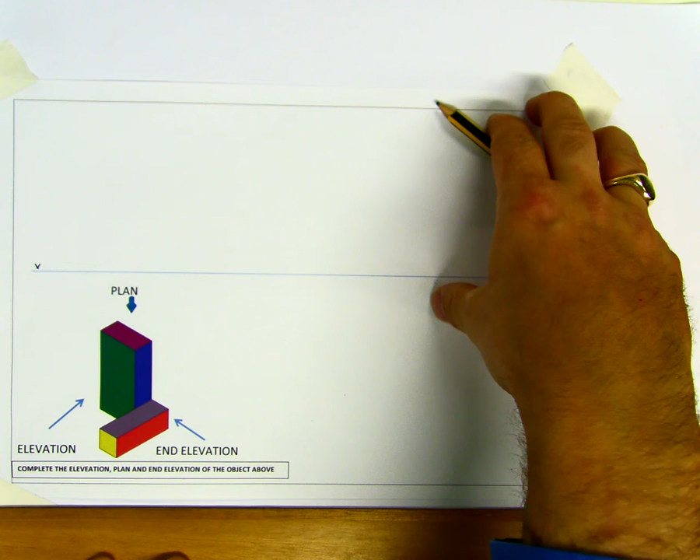If our drawing is down in the bottom left hand corner, we should always start our drawing in the top right hand corner. It's left room on purpose, so you should realise that straight away. If it was here, you'd start your elevation, plan and end view. If the drawing started here, you'd have gaps, so you'd have your elevation, plan and end view.

In the exam there's 3 of these questions. You're going to be able to figure out where to start the question straight away, so you won't be wasting loads of time. So what shape are we going to be looking at from the elevation?

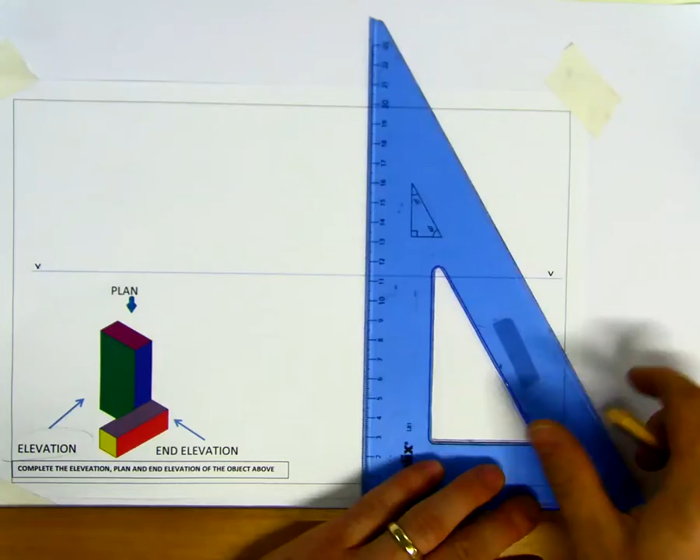What shape is it? A rectangle and a square. So the first thing I'm going to do is draw a rectangle.

It's 20, so I've measured it there, 20 by 40. Measure across 20, mark it, bring up my 2 lines. Now, very lightly - they're construction lines, you don't heavy in anything yet. At the start, always do it really lightly. So this is 20, and then the height is 40. So mark 40 - we have the first shape, which is a rectangle.

And what colour am I going to colour that one in? Green. Okay, would it help if the green was working? I'll use this one - so this is green.

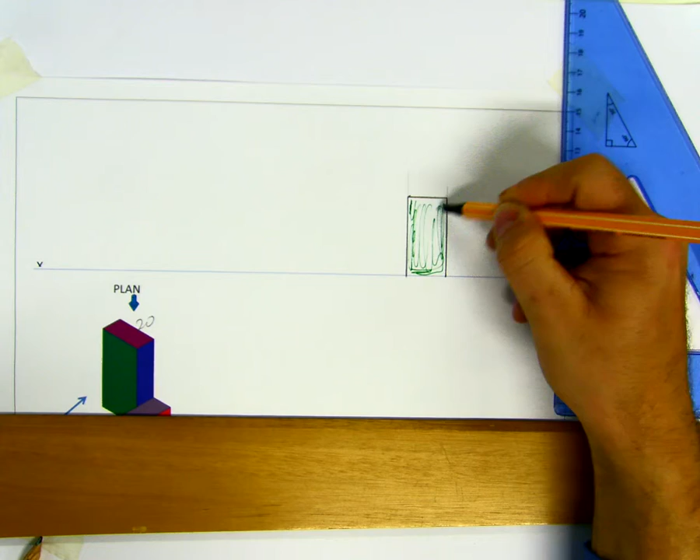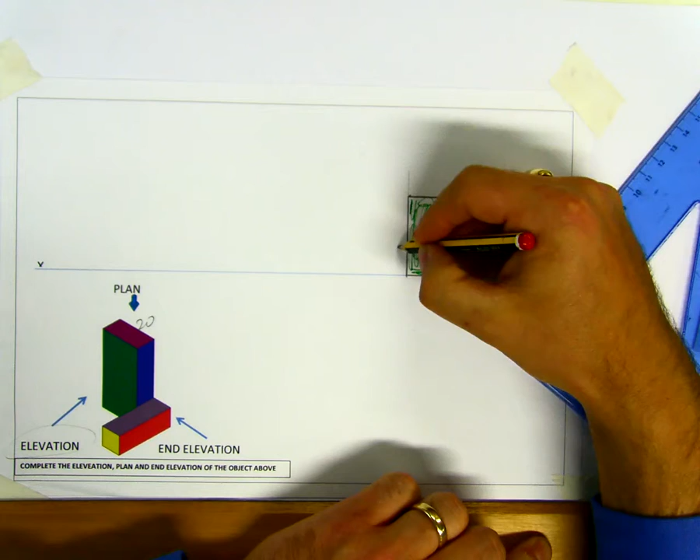So what else have I to put on it? A yellow square. Where's it going to go? On the right side. So I've measured it, it's a square, 10 by 10. So I've measured across 10. This was 40, this was 20, measured across 10 here, and measured up 10.

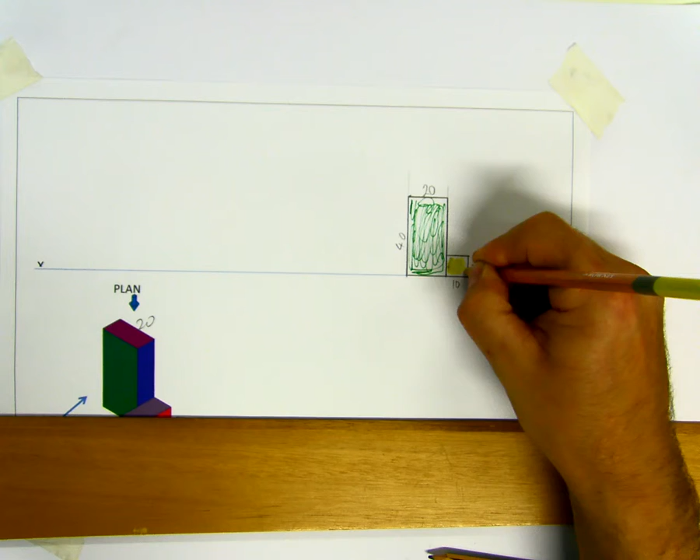And it's going to be what colour? Yellow. Okay, did anyone have any problem with that so far? Did it too big? That's fine. Is it in proportion - is it a rectangle and a square? Yeah.

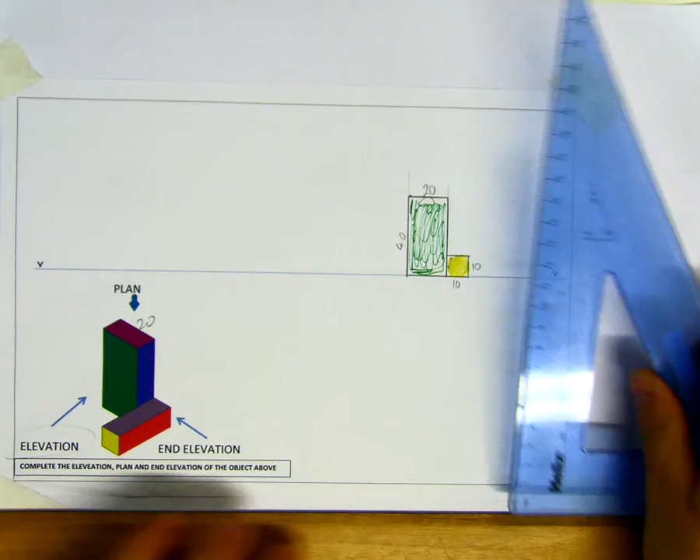Okay, well you wouldn't lose too many marks as long as it's in proportion, because you don't have measurements on the drawing - you're just taking the measurements off it. So then the next thing we do is, that's our elevation. Anyone have any problems?

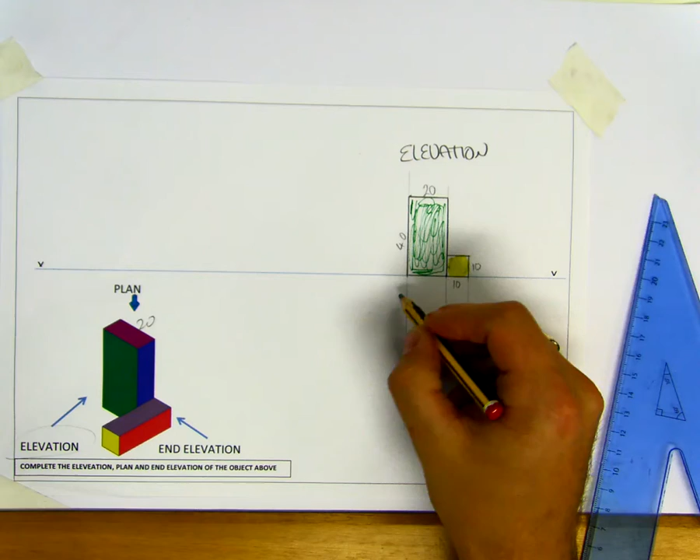Okay, pencils down. So lightly, very, very lightly, bring down all your lines to your plan. Okay, we're going to measure then - what distance did we say? 20 millimeters, so measure 20 millimeters, mark it. And then we have a line going horizontally across the page.

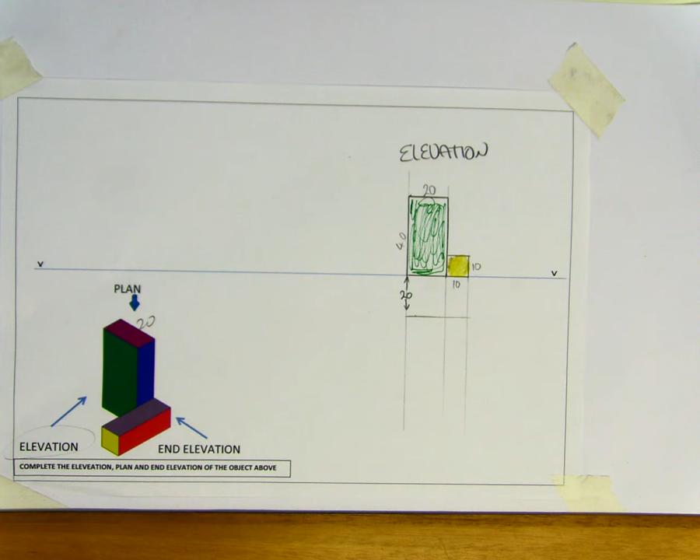So when we look down from the plan view, from the top, what colour are we going to see? Purple and grey. So we're going to see this rectangle here on the left and this rectangle on the right. So we have the width, so we don't need to measure the width anymore - we just measure the depth of it, which is 10.

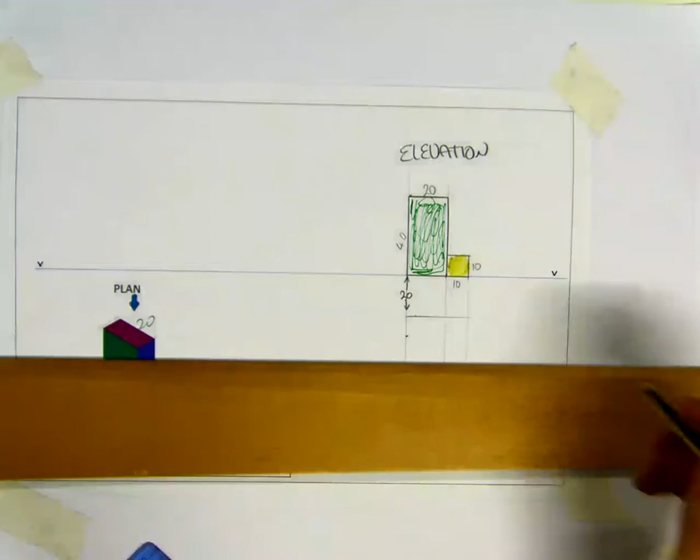So from that line, we're going to measure 10, mark it - that's going to go over. Is it going to go all the way across? Where is it going to stop? At the line - perfect, so we're at the line.

So we can heavy into things that we know we're going to keep. Are we going to see a line here? Is there going to be a shoulder? You're going to see that shoulder there when you're looking down - they're in line with each other, so when you look down, there's going to be a line. Aoife, pay attention.

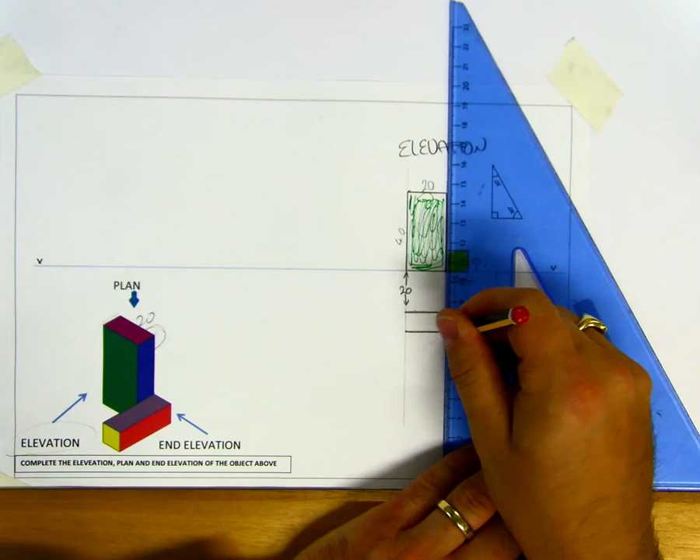Okay, and that's going to be what colour? This one here? Yeah, so it's purple. So colour code everything, it makes it so much easier for you.

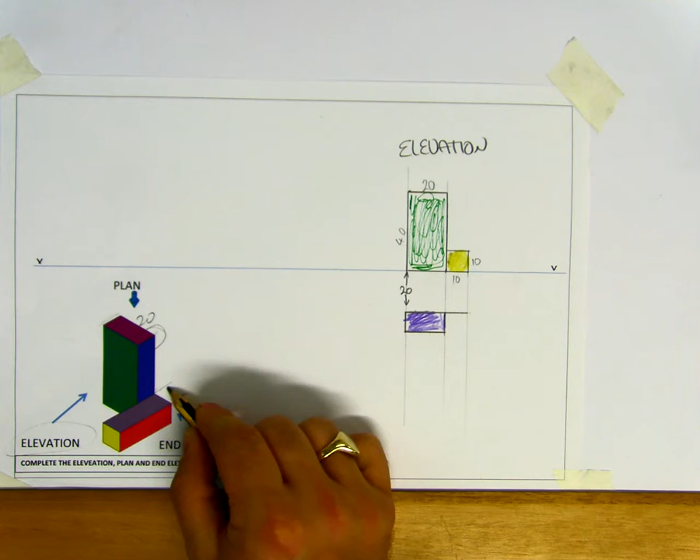So we have the width of the box here at the back. So this width here is equal to this width here. Does anyone have any problems with that? No? Good. So the length of it then is 30 millimeters.

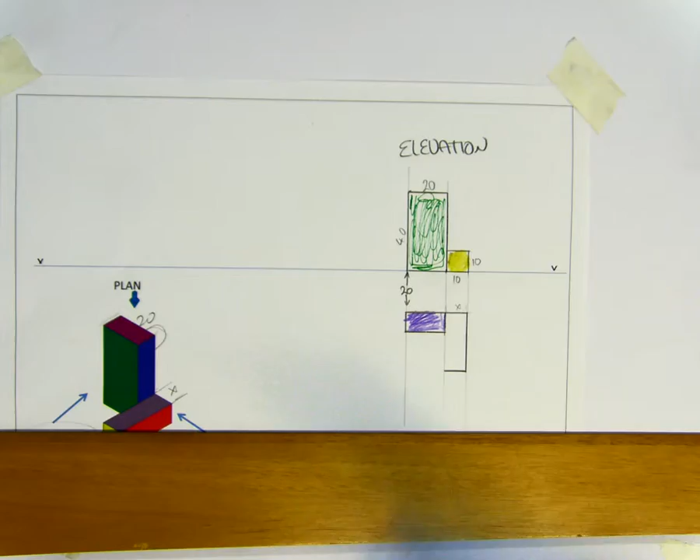So we're going to measure 0 to 3, which is 30. Draw our line down, mark 30. Draw our line across. Draw our line up. And we're going to shade that in.

That's the rectangle on what side of the page, Lee? The right. Good, thanks Lee. Right hand side of the page.

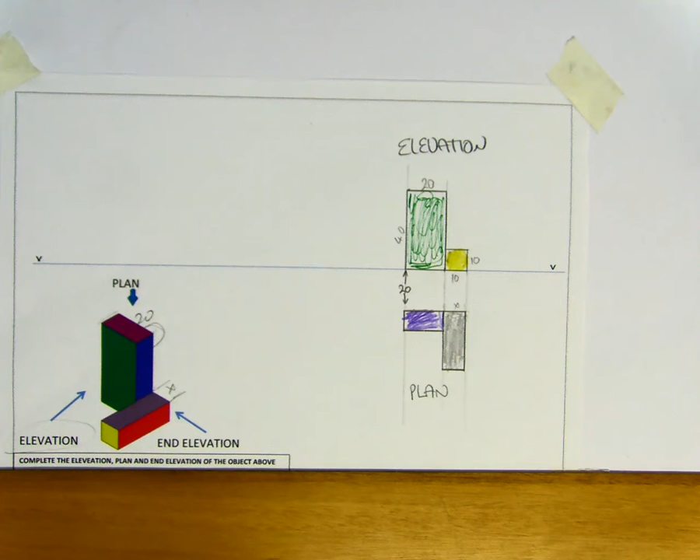Okay, so we have to finish off the drawing. So what are we missing? We have our elevation, we have our plan. So end elevation, we're going to get the end elevation.

So there's going to be a little man over here, and he's looking straight at the side, the right hand side. So if he's looking at the right hand side, it's going to be projected on the left hand side. Okay, so we have our heights.

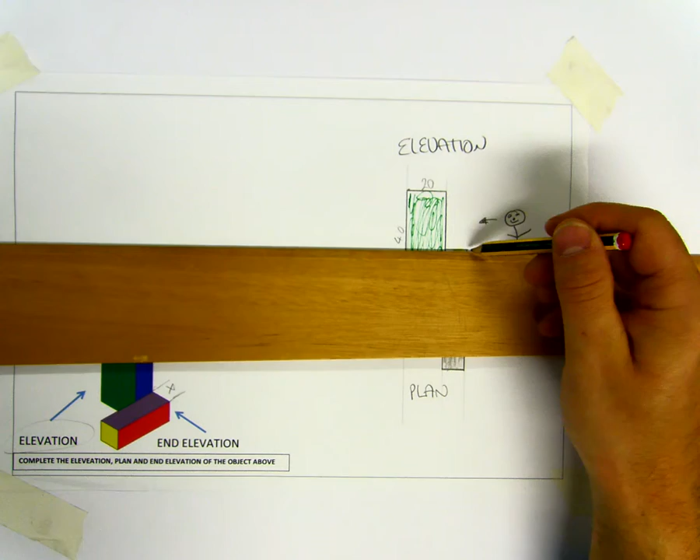All we need to do is lightly, using construction lines, bring our heights across from the two rectangles. Okay, so we've loads of information that we've already got.

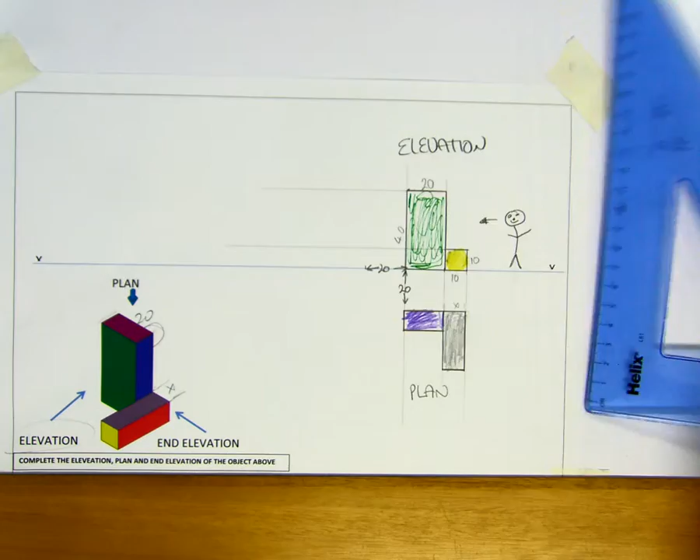We're going to measure then a distance of, what distance did we say? 20. Okay, so we're going to have our start here somewhere. So bring up a line lightly.

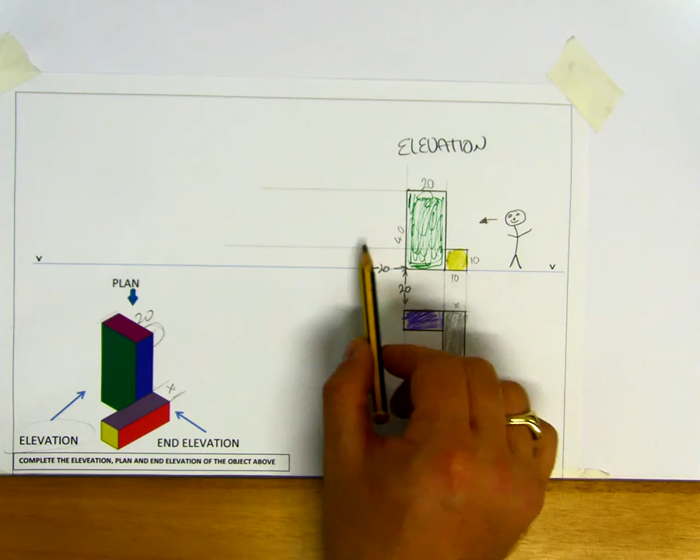And how far across are we going to come? 10. Okay, so it's the same height as this. So we measure 10, mark it, and bring that line up. Okay, is that right?

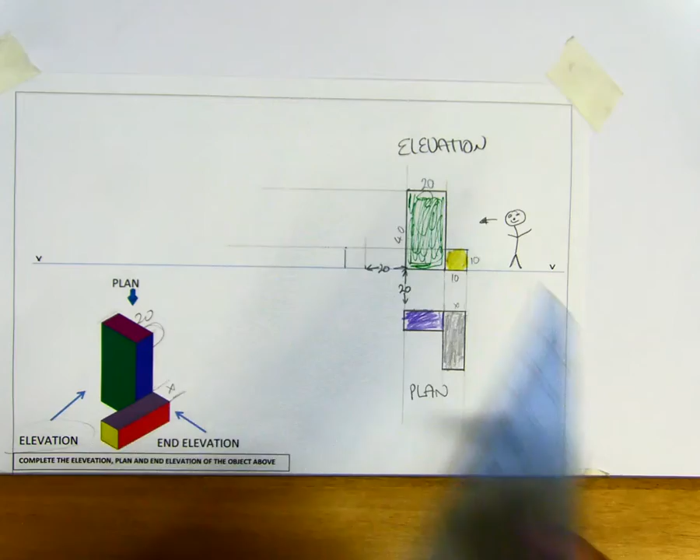So that's our first edge. So how wide is it going to be? What colour is the edge we're going to see? If we're looking in from the right hand side, yeah, we're going to see this red rectangle first.

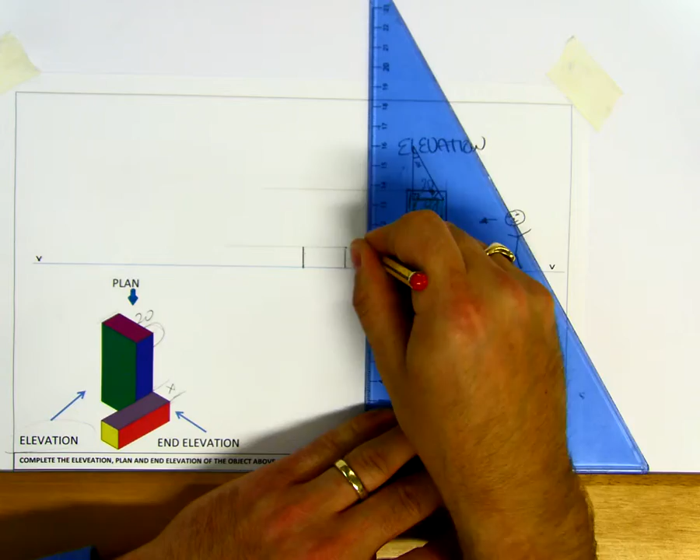We have the height of the rectangle here, and we have the length here, so it's 30. So we're going to measure 30 from the line, mark it, bring it up both sides, across the top. Okay, ignore that line, and we colour it in red.

Is that it finished? What colour am I missing? Blue. So this corner here you can see is in line with this corner at the back.

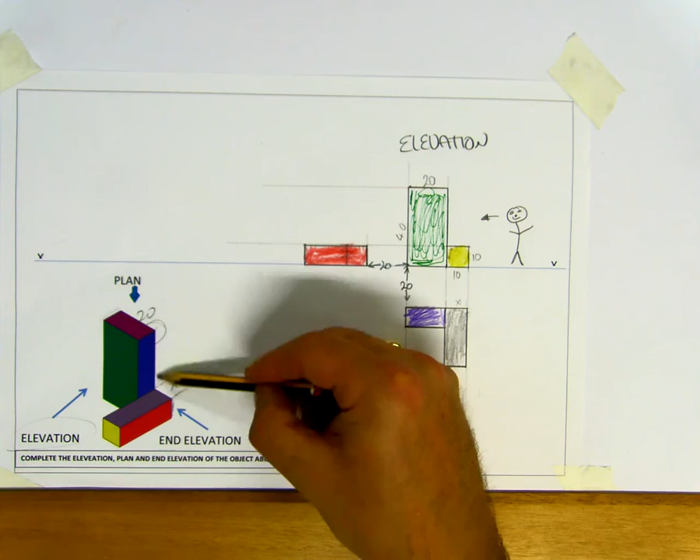So when he looks in from the side, it's going to be a line. So how far up is it going to go, Dennis? Where do I stop this line? Yeah, because we're looking in from the front and the side, the height never changes.

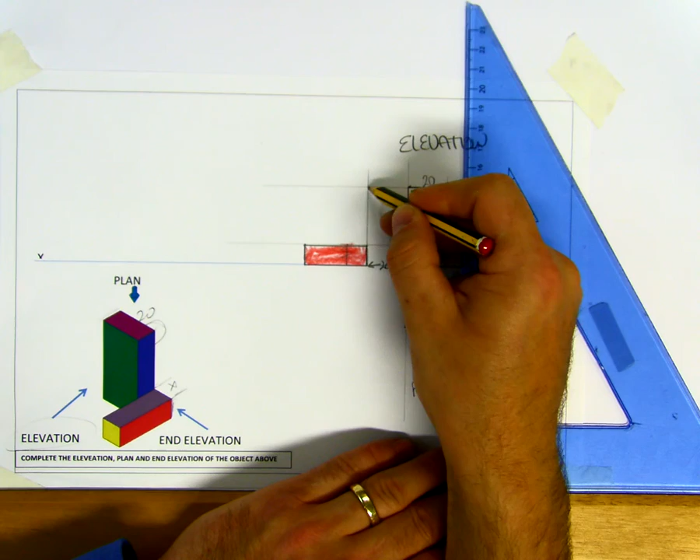So we brought the height across. Where them lines intersect, we'll give you that height line. We'll bring it up. Okay, so it'll start here, and we know then we can measure 10 mil, bring 10 mil across, and finish it off.

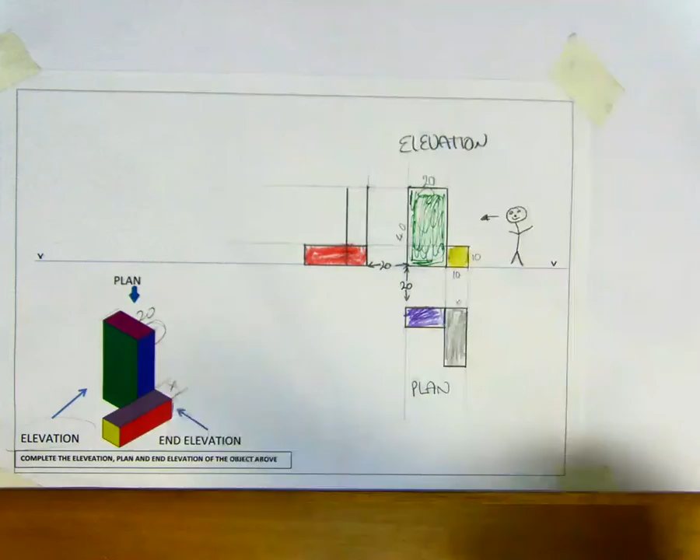So we can heavy that in, and colour it in. What colour? Yeah, so it's blue.

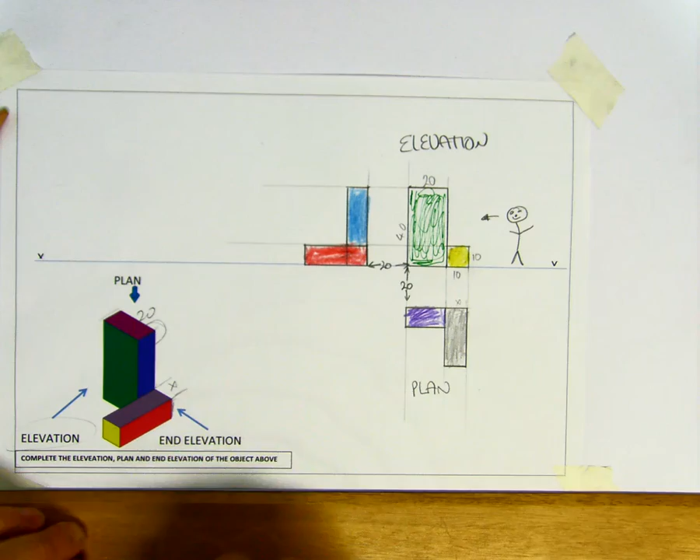Okay, so colour code everything, make sure it's all the right colours. So grey, purple, yellow, green, blue, and red. Okay, so colour code everything, make sure. Does anyone have any questions?